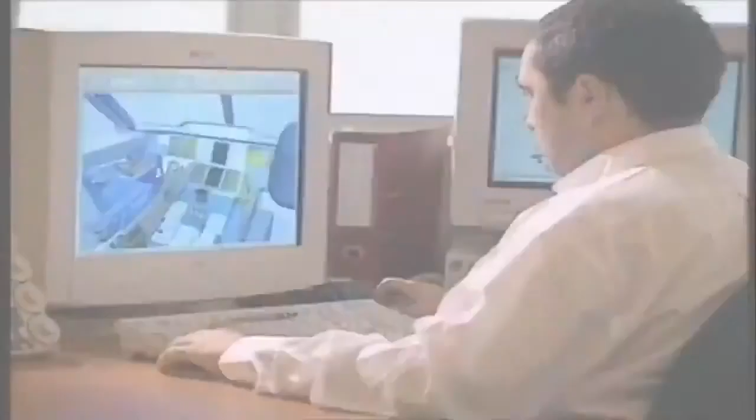It's a mega plane, bigger and heavier than any other passenger plane in the sky. It will hold more people than any commercial jet flying. Designers have spent billions. Now is the moment of truth. Will the world's biggest passenger airliner survive its maiden flight?

An early spring morning, clear skies and a light breeze over southwestern France. Crowding the fields that flank Toulouse International Airport, 40,000 spectators, backpackers, campers and journalists from around the world. All vying for the perfect spot to watch the maiden flight of the Airbus A380, the largest passenger plane ever built.

It's 73 meters long, 7 stories tall at the tail, almost 80 meters from wingtip to wingtip, heavier, longer and taller than a 747, with 2 full levels of seating, enough to hold over 550 passengers.

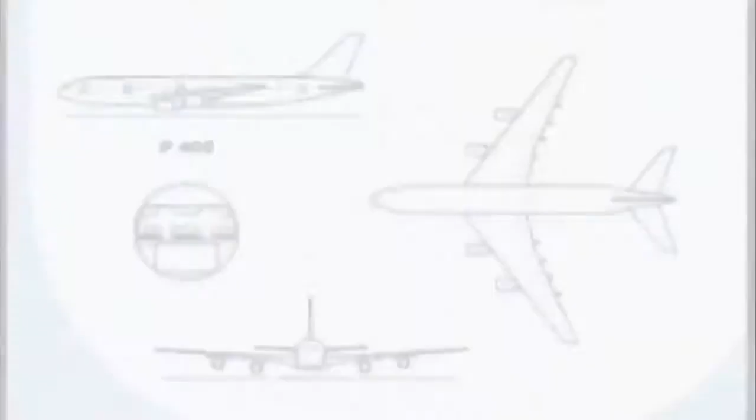Getting this monster off the drawing board required new, super lightweight materials, 4 powerful new mega-sized engines, massive new factories across Europe, and a computerized flight control system more sophisticated than any other in commercial aviation.

This moment is the biggest gamble that the company has ever taken. A $12 billion investment, the company's entire future, and the lives of future passengers all ride on the success of this historic test flight.

Alongside the runway, a hush settles over the crowd as the megaplane comes into view. Gradually, it gathers speed, accelerating to reach its takeoff velocity of 269 kilometers per hour. Then, as it nears the end of the runway, the moment of truth. The massive nose tilts skyward. A sliver of daylight appears beneath the rear wheels, and the Airbus A380 takes to the sky for the very first time.

The engineers and technicians in the crowd breathe a collective sigh of relief. Their baby is flying. The question now is, does anyone want a plane this big? Will the unprecedented size prove a boon or a boondoggle? Is this super jumbo the future of commercial aviation? Or the biggest white elephant since Howard Hughes built the Spruce Goose?

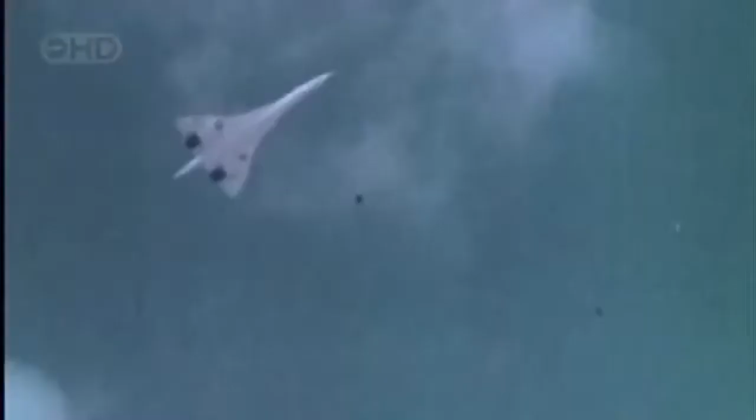The Concorde is here. That same year, Aerospatiale and British Aircraft Corporation, the precursor to Airbus, introduced the Concorde. While Boeing was bulking up, Europeans were getting small, but very fast. The Concorde traded capacity for speed. The plane carried only 128 passengers, but it could cruise at twice the speed of sound, cutting the trip from New York to London from almost 8 hours to just under 3.5. Both the 747 and the Concorde came to be the epitome of luxury in air travel.

These two differing visions came to symbolize a fierce rivalry between American and European aerospace giants. A rivalry that's only intensified with time, even as the business of air travel has changed dramatically. The Concorde, after years of financial difficulties and a devastating crash in Paris, has been grounded. And the 747 is now an aging workhorse, noted less for style and more for the sheer number of passengers it can pack between its wings.

What changed to turn air travel from a luxury to the airborne bus ride that it is today? Simple economics. In just a few short decades, the number of people traveling by air has tripled. Now, every day, hundreds of thousands of people pack into 70,000 flights, taking off and landing at more than 4,000 airports around the world. And those numbers are only going to get bigger, much bigger. Industry analysts predict that the number of air travelers could double again by the year 2020. That is, if anyone can figure out how to squeeze them into an already overcrowded system.

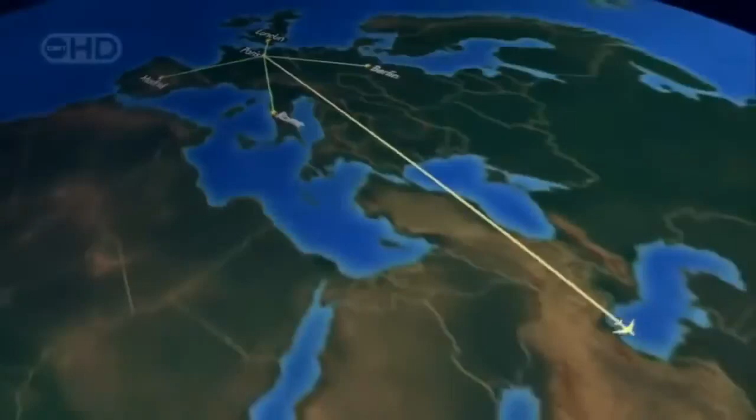The A380, though, is an altogether different order of beast. It's designed for hub-to-hub travel. Passengers will board a small plane near their home, then connect at a major airport to a larger plane, travel halfway around the world, and get off at their final destination. It's a strategy specifically designed to serve the most rapidly expanding long-haul routes in and out of Asia, and to cater to customers who appreciate a bit of pampering.

The plane's sheer size, with 2 passenger decks, is large enough for both standard seating as well as more luxurious features, like a lounge, a high-end shop, 2 staircases, even a waterfall. It's a breathtaking dream. But no one knew if such a plane could be built. Some argued that such a craft would be far too heavy and expensive to be practical. But a tenacious and aptly named Airbus executive, Charles Champion, wouldn't take no for an answer.

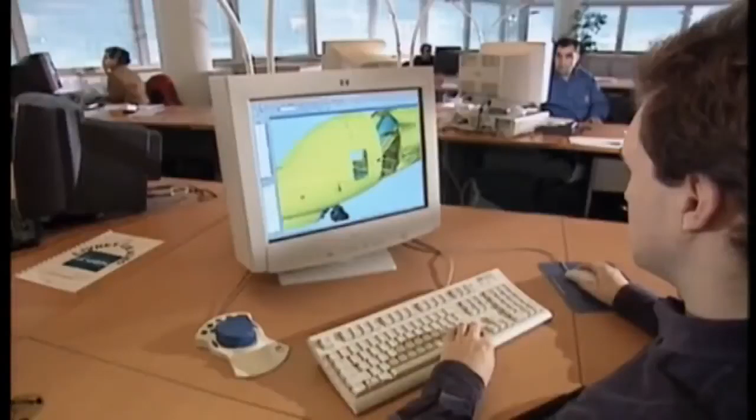He encouraged his design team to think outside the box. Yeah, well, there were lots of weird designs. Some looked at the double bubble. One of their first ideas, the double bubble, a double-wide fuselage. It looked promising, but computer analysis showed that it would be far too heavy and not sufficiently aerodynamic. So Champion sent his team back to the drawing board, and eventually they came up with this history-making concept.

A full-length, double-decker passenger cabin, with a third deck below for cargo. Space-wise, it's the equivalent of 2 complete wide-body cabins, one on top of the other. The new plan called for an aircraft only 2.5 meters longer than Boeing's 747. It was 15 meters wider and 5 meters taller.

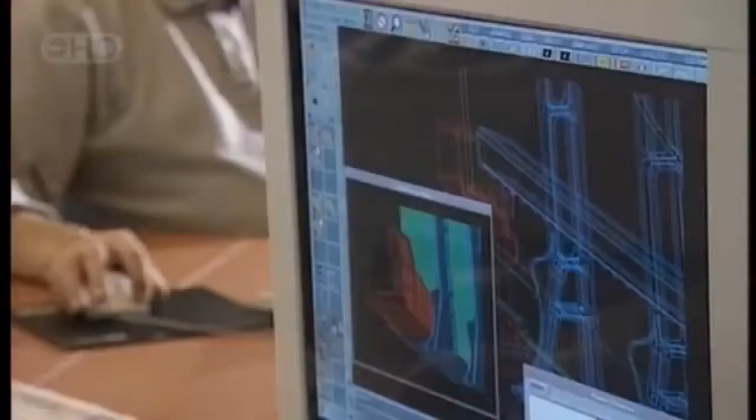But when they ran the design figures through the computer, they had a shock. The plane was far too heavy. We came up with horrid figures, saying, my God, this is the weight of the aircraft, doesn't work. So what we did immediately at the launch of the program, or 2-3 months afterwards, we launched a very strong challenge on the weight. The team set out to bring the base weight of the aircraft below 277 tons.

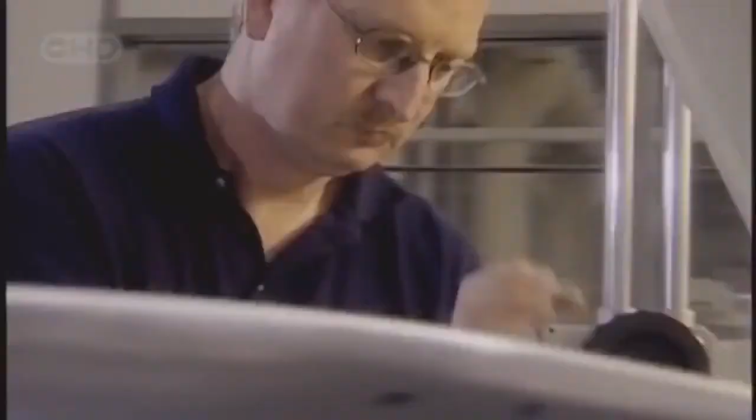That's only about 50% heavier than the 747. An ambitious goal for a plane designed to carry over 100 more passengers and their luggage halfway around the world. Unless Champion and his engineers could find the means to beat that target, the dream would die.

Airbus engineers were faced with a design challenge that called for a lightweight plane carrying over 550 passengers at a lower cost per seat, not to mention quieter and less polluting than anything in the air. The design team knew they would have to rethink everything. They needed lighter materials, more powerful engines, larger wings, even bigger and smarter factories. Every component would have to be scaled up from supersize to mega size.

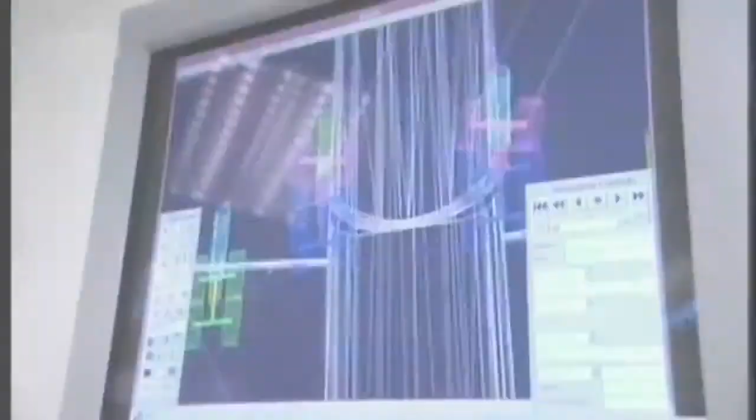But even while the engineers were still scratching their heads over the details, the Airbus sales force was already hard at work, seducing customers with visions of the future. They created a full-sized interior mock-up that promised passengers in coach some relief from the grind of travel, with seats an inch wider than in other planes, and overhead bins 10% larger.

Each plane can also feature a new interior illumination scheme to eliminate the upsetting effect created when flight attendants suddenly switch on overhead lights. The kinder, gentler system in the A380 mimics the gradual transition from day to night and back to daytime again. These and other innovations make the plane distinctive, but it's the promise of opulent luxury that really turns heads. To help build excitement, computer programmers constructed a virtual showroom where airlines can bring to life their wildest design fantasies.

Ladies and gentlemen, this is your captain speaking. I'd like to welcome you on board this 3D tutorial for the A380 main deck door.

Using this 3D lab in cyberspace, airlines can experiment with cabin layouts, color schemes, and seating arrangements. Airbus has encouraged customers to think big. Bathrooms with showers, spacious lounge areas, restaurant bars, and even an in-flight salon. But until the planes are actually put into service, most airlines have chosen to keep their final designs as closely guarded as any other trade secret.

Of course, no dream could take flight until engineers came up with a way to lift all that weight. In late 2000, builders finally settled on a design. For power, they would buy engines built by Rolls-Royce, capable of providing 30% more thrust than the engines used on the 747. Each massive power plant cost $15 million, as much as a ton of gold. Altogether, they account for almost 25% of the cost of the entire plane.

If there's one thing this aircraft needs, it's thrust that won't quit. Each engine provides up to 80,000 pounds of force. Running at top speed, this mega guzzler sucks down a litre of gasoline every second. The A380 is designed for routine flights lasting 13 hours or more. That means when it's fully tanked for takeoff, the A380 carries a lot of fuel. 260,000 litres, 20% more than the load carried by the 747.

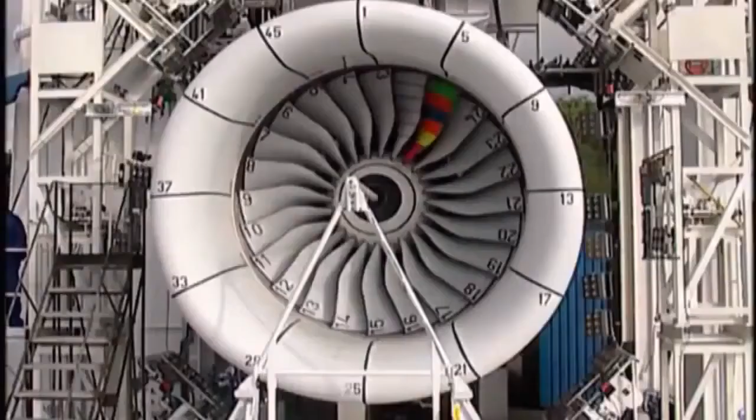Just imagine what would happen if anything threatened the integrity of one of those fuel tanks, like a catastrophic engine failure that sends shards of metal tearing through them. That's the nightmare that haunts engineers at Rolls-Royce, and they're about to destroy an engine to make sure it never occurs. These 24 titanium fan blades suck air into the maw of this A380 engine. Each blade is 1 meter in length and weighs 15 kilograms. Lightweight, but super strong.

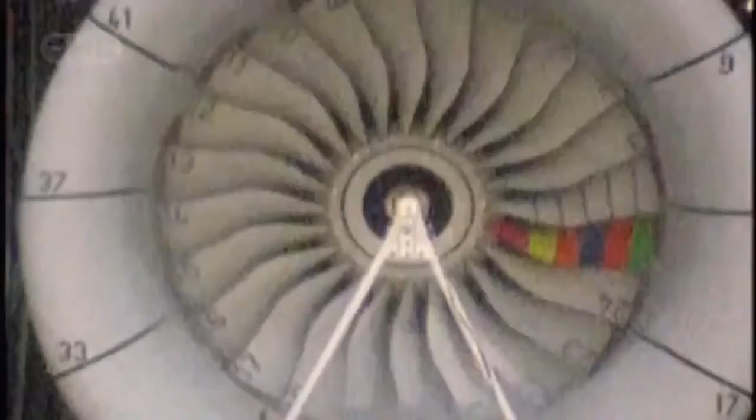When the engine is roaring along at full throttle, the blades spin at almost 3,000 revolutions per minute. The centrifugal force at the tip of each blade is equivalent to the weight of a 110-ton locomotive. If one of these were to break off and escape into the engine, it could wreak unimaginable destruction to the plane. That's why Rolls-Royce engineers are about to conduct an engine failure test. They're going to intentionally cause one of the fan blades to break off at full speed in order to prove that the engine enclosure can contain the damage without letting any metallic fragments escape.

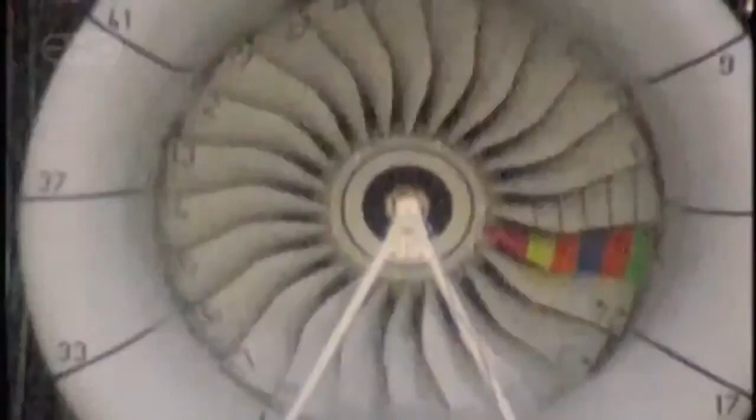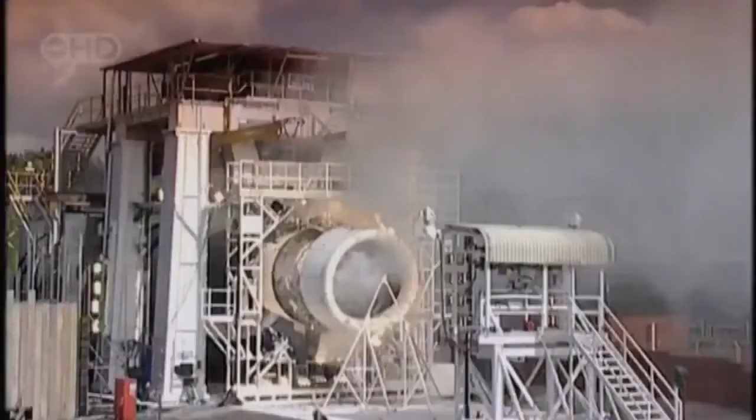In the process, they will totally trash this $15 million engineering marvel, a small price to pay when the lives of over 550 people could be at stake. A super slow-motion camera captures every moment in excruciating detail. The blades are striped to make visual measurement easier. When the fan is spinning at full speed, engineers send a signal to explosive bolts at the base of the multicolored test blade. Faster than even this camera can see, the knife-like piece of metal shears off and flies into the engine mechanism, wreaking havoc, but no fragments escape.

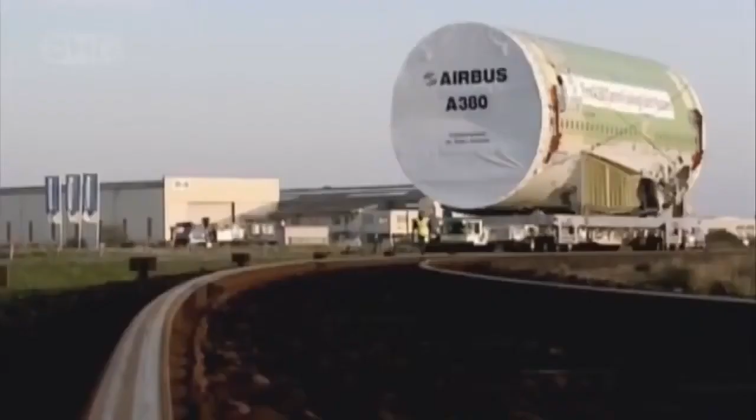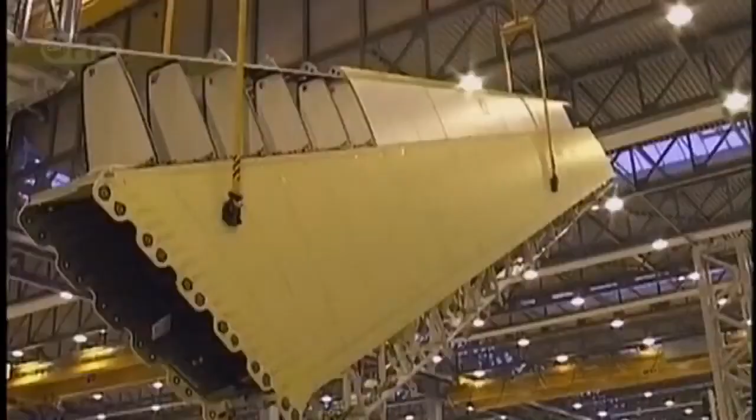The A380 engines are safe for flight, but there are many more pieces to the puzzle. Every other major component would have to be designed from the ground up. Luckily, Airbus has already turned the world into a giant mega factory, with 1,500 suppliers and facilities used to build its existing planes, scattered over 30 countries, yet tightly linked by an advanced communication and transportation network. To assemble the hundreds of A380s the company hopes to sell in the coming decades, planners settled on 5 countries to build the major components. Wings in Wales, engines in England, the fuselage and vertical tail section in Germany, the horizontal tail section in Spain, and of course France, where all the pieces came together to assemble the finished plane.

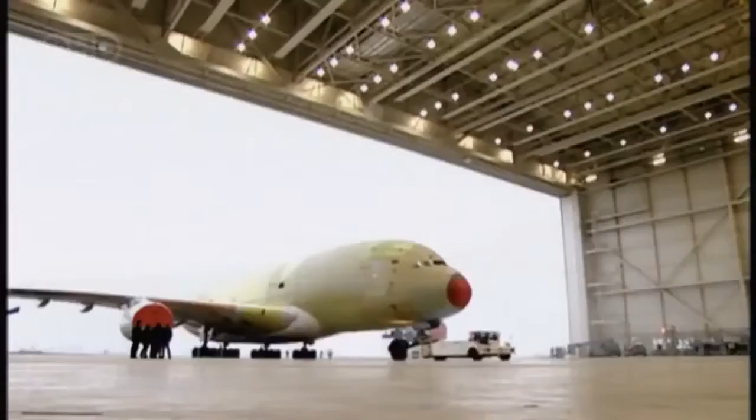The process begins in Wales, in 2 huge new wing factories, built to assemble the largest and most structurally complex commercial airplane wings ever designed. 32,000 components, shipped in from every continent except Antarctica. The wings on the A380 are true mechanical marvels. They provide flight control and enough lift to carry the fuselage, plus the 4 supercharged engines, each weighing nearly 6.5 tons. And with 260,000 liters of fuel loaded inside 10 interior locations, the wings are also flying fuel tanks. They're one of the most critical structural components in the entire aircraft.

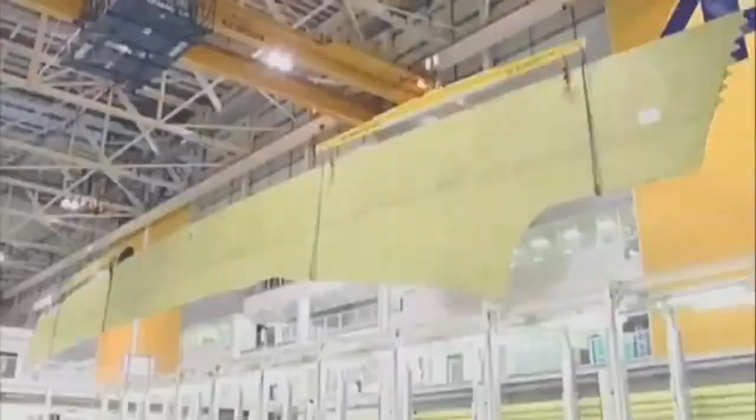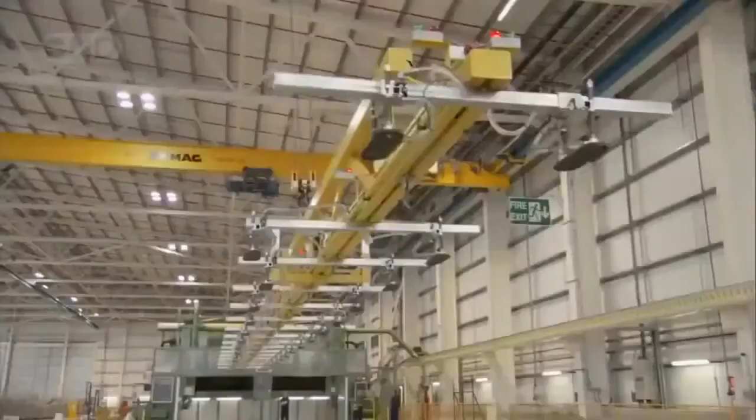The precision construction process begins with sheets of aluminium. Destined to be shaped into the 10 panels that cover each wing, each piece has its own shape and weight requirements. To whip one up, just follow 3 not-so-easy steps. Shave it, wrap it, then bake it. This 34-meter-long slab of aluminium weighs in at 5 tons. Way too heavy for the wing panel it's destined to become. In its final form, it will weigh close to 1 ton. So off it goes, to get the aerospace version of a tummy tuck. Overhead cranes use 32 powerful suction nozzles to lift and transport each aluminium slab.

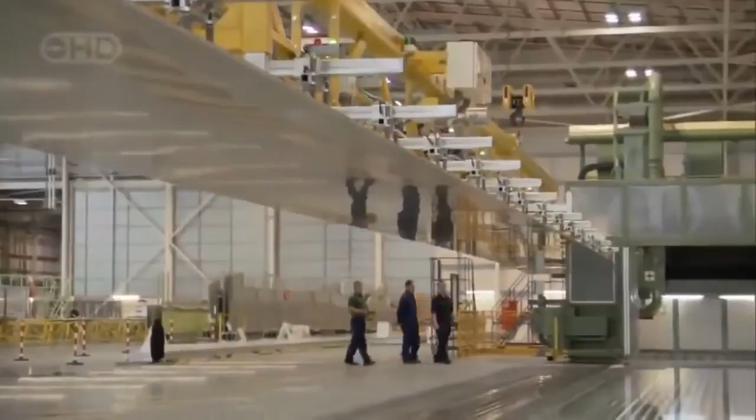Tim Fernifer carries the burden of responsibility. Using a remote-controlled steering device, Tim guides the 5-ton piece of metal across the factory floor, but he can't do it alone. His team must watch the motion of the wing panel throughout the ride. You've got to be particularly careful that I'm handling it. But I can't see down the other end, so I need another pair of eyes down the other end. It's just health and safety issues. You have to watch, make sure everybody's out of the way when it's actually moving. It's a dicey ride across the factory floor before the huge sheet can settle safely into position.

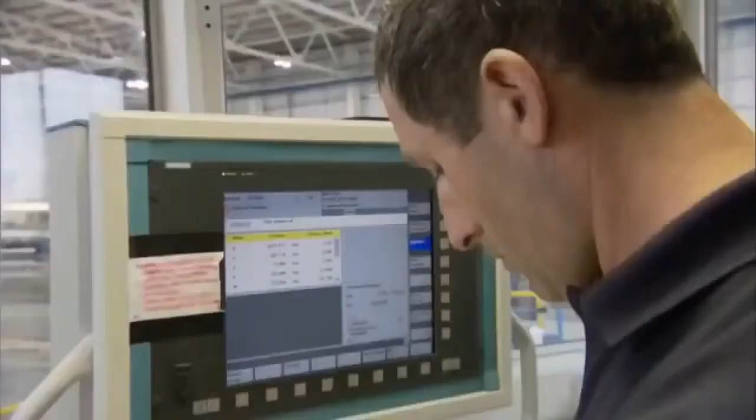A milling machine 40 meters long. Like an oversized cheese grater, the precision cutting head slowly cuts back and forth across the surface of the wing, painstakingly shaving the aluminium until the panel shape matches the 3D contour map stored in the machine's computer. The process takes up to 3 days. It eliminates 75% of the panel's weight while maintaining its strength.

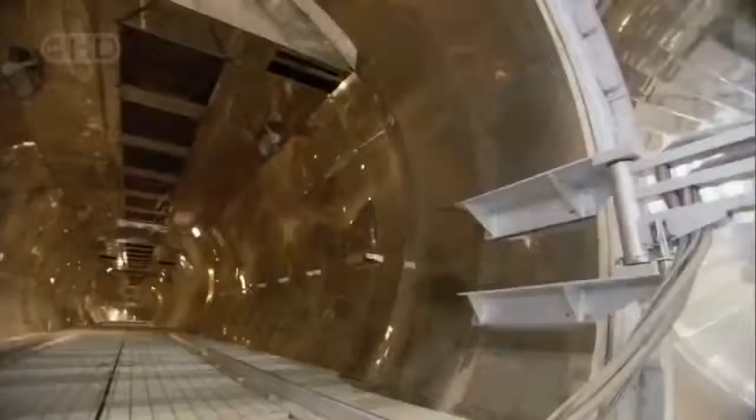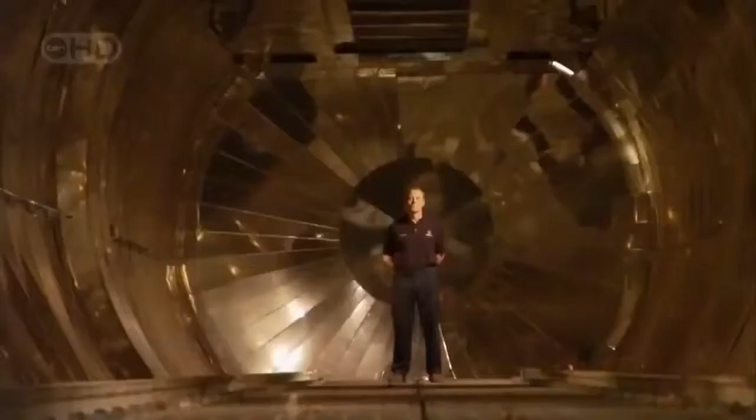Then it's ready for the oven, one of the world's largest pressurized heat chambers, 42 meters long, almost 6 meters wide. Technician John Massey has cooked plenty of wings for smaller Airbus planes, like the A320. It's a challenge to see it go from the size of the 320 to the size of the 380. It's a huge, huge jump. The A380 wings are 50% larger than A320 wings. That means a 50% greater chance of error in this critical process.

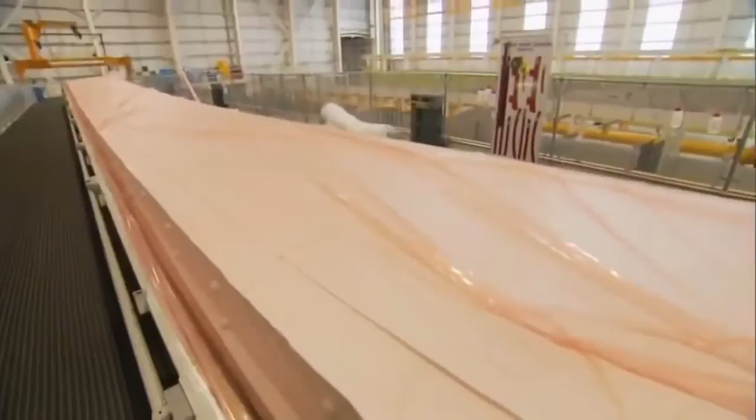Baking requires careful setup. First, Massey and others place the segment in a special metallic form. Then they vacuum seal the entire assembly with a massive piece of plastic shrink wrap to protect the metal from contamination. Inside, the heat must be uniform across the entire panel, 150 degrees centigrade, with no room for error. We try to avoid any changes in the vacuum or the temperature, so the temperature must remain constant right throughout the process. It must maintain within 3 degrees, otherwise the run is invalidated. After 24 hours, the panel is ready.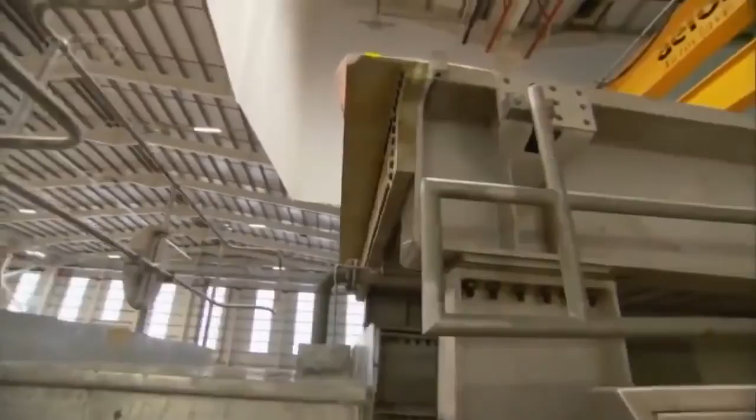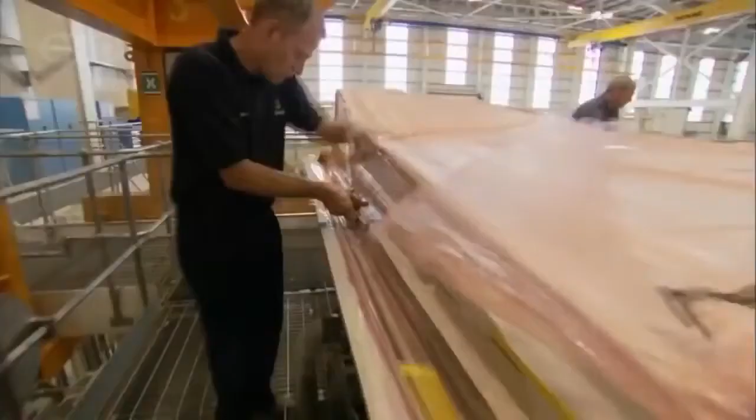Specially equipped vehicles rise up and move into place in front of the oven. All eyes are on the plastic protecting the wing panel. If it breaks, the aluminium wing piece is compromised. A disaster. The entire wing panel would be worthless. If the bag bursts, it means starting the job again from scratch. Anxiously, they scan the surface for any breach. At last, the wing is cool enough to touch. And good news, the bag appears to be intact. Finally, the wing segment arrives in its docking bay. Here, the technicians first remove the plastic and cloth wrap.

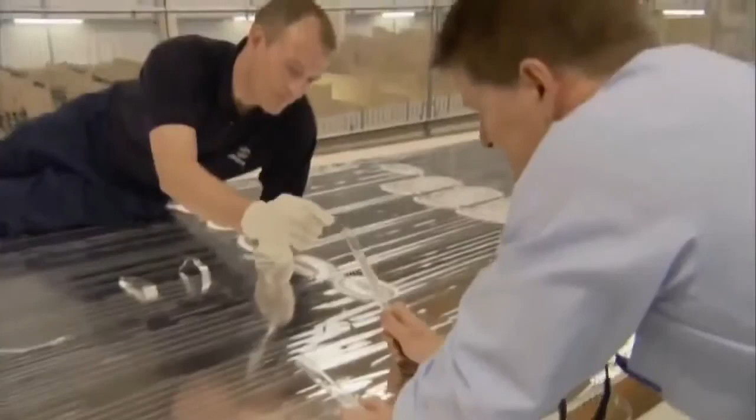Now begins the tedious search for flaws. John's boss, Gareth Williams, arrives to inspect the piece. He retrieves small metal rods that were baked onto the top of the wing panel. Each of these cylinders tells an important story about future safety. These are test pieces which are made of the same material as the wing panel, and we use them to confirm that the heat process that this part's just gone through is correct and it's to the right specification. When this testing phase is complete, Gareth and John get the okay to move the wing to its next destination.

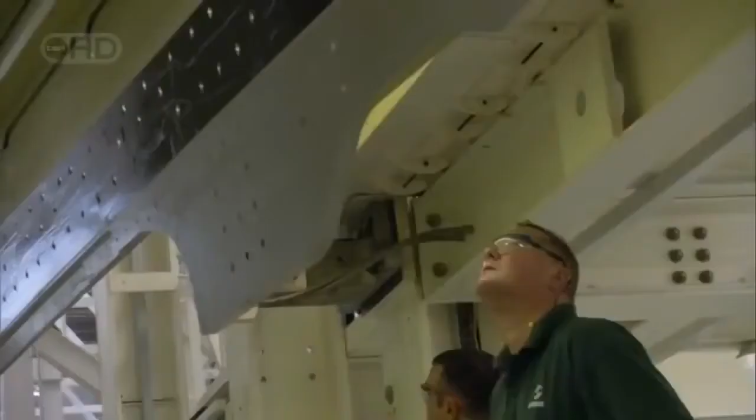The nearby wing assembly plant, an enormous brand new factory located just up the road. It's one of Britain's largest industrial buildings built in this century. It's nearly 85,000 square meters in area, equal to 12 full-size football pitches. This is where the builders attach the aluminium skin panels to the wing skeleton. George Lee guides his team through the tricky assembly process. Today they're preparing to lift and place one of the largest of the 10 aluminium panels, 34 meters long and weighing in at more than 1 ton.

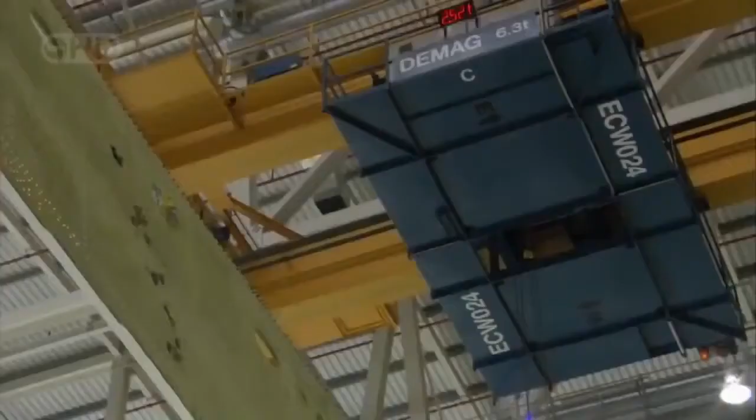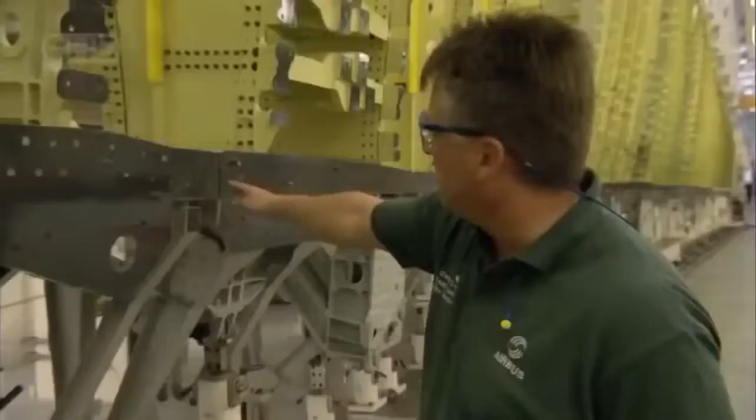Size is a great challenge because everything requires some form of overhead lifting. Nothing can be lifted manually, so virtually everything requires overhead craneage movement, and therefore the management of the craneage system is very, very important. The panel hangs like a huge guillotine, suspended over the factory floor. But that's not all that's hanging over the assembly team's head. Time is running out. Along the edges of the partially constructed wing, builders have applied a sealant that'll help to ensure the integrity of the fuel tanks. The sealant dries quickly within hours. The team must fit the wing panel into place before the sealant dries, or the wing could be defective. This time they're cutting it close.

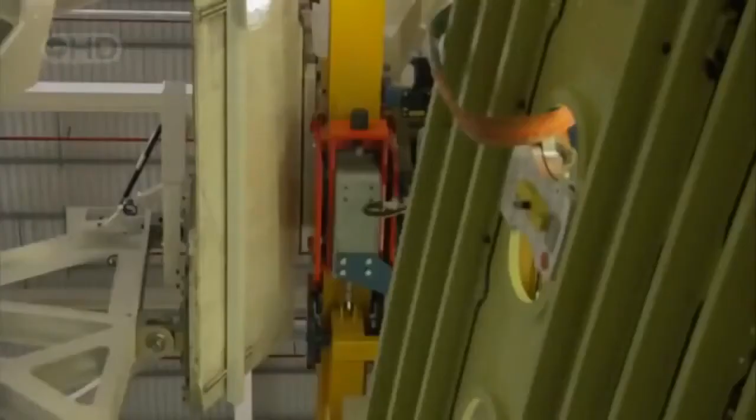The only concern I've got is the time factor. If they don't succeed, the team will have to scour the sealant off the aluminium surface and start the whole process again. Finally, the panel settles into place. 1 down, 9 to go. It can be stressful, yeah, it can be stressful. At certain times, it's an enjoyable job, because when it actually all works and goes together, it's quite enjoyable. You've made it an achievement.

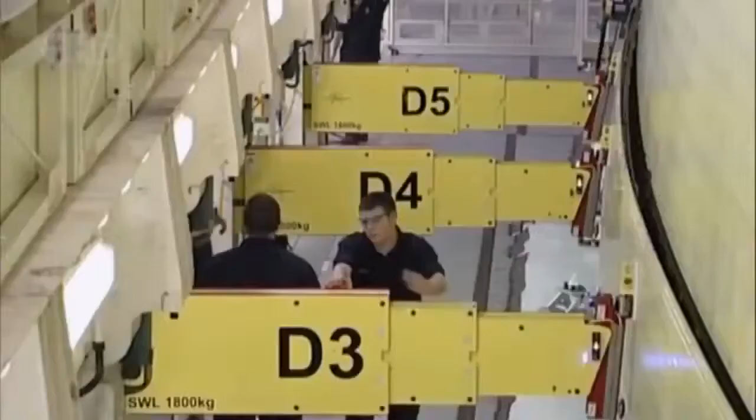Now it's time to glue and bolt together the pieces, like building the world's biggest model airplane wing. This part of the process remains a carefully guarded trade secret. The company wants our cameras off. No cameras.

The secret assembly process inside the jig will take nearly 4 weeks to complete, but it takes more than a wing to make a plane. All across Europe, more factories are coming online, pumping out body parts of this giant Frankenplane. But not everyone is happy to see this kind of progress. Some locals in Germany are up in arms over Airbus's ambitious plans.

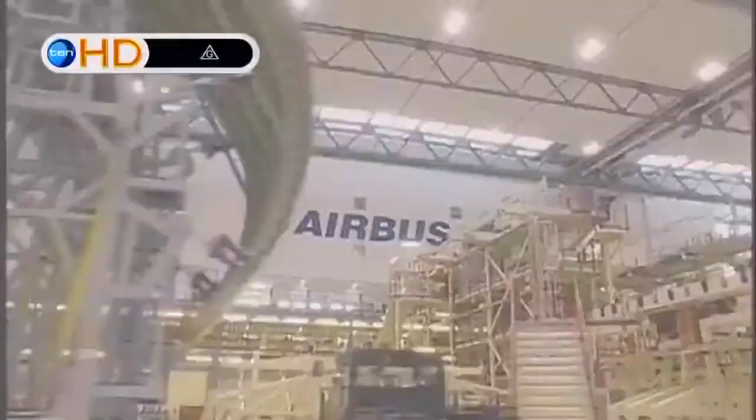This is the newest Airbus factory in Hamburg, a megastructure big enough to house 4 A380s side by side. Airbus has been building airplane fuselages in Germany for more than 30 years. But with the announcement of the A380, the company needed to massively expand the site and send finished planes here to get tricked out on the inside and painted on the outside.

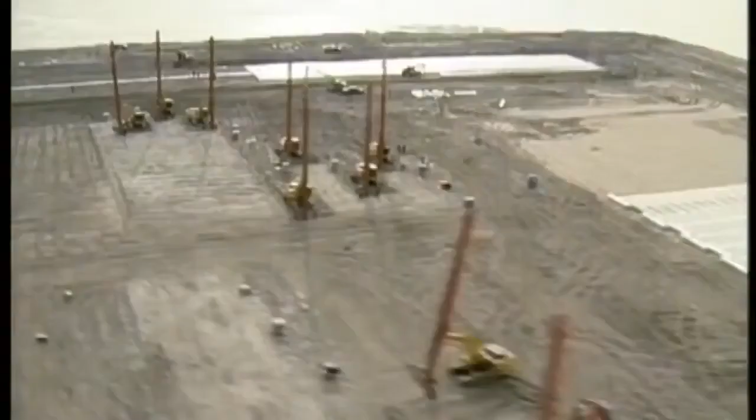No matter what the customer wants their plane to be, a 550-seat cattle car, a high-class hotel in the sky, or even a heavy-duty freighter, this is where the seats, the carpets, the stairs, and yes, even the bar and the waterfall will all be installed. The expansion plan called for 3 new buildings and a longer runway to accommodate the massive plane, but there was a problem.

Airbus's main factory here sits alongside Germany's Elbe River, smack in the middle of Europe's largest tidal wetlands. It's a very special area because we have there the influence of water from the country and tidal water from the sea. So we have a mixture of sweet water and salt water. This fragile ecosystem is home to 70 species of migratory birds. Now 71 if you count the Airbus A380.

Airbus wanted to fill in 140 hectares of pristine wetland, and local activists cried foul. A pitched battle in the courts and demonstrations in the streets delayed construction of the factories for over 2 years. But eventually, local and national politicians who wanted to bring business to the community intervened.

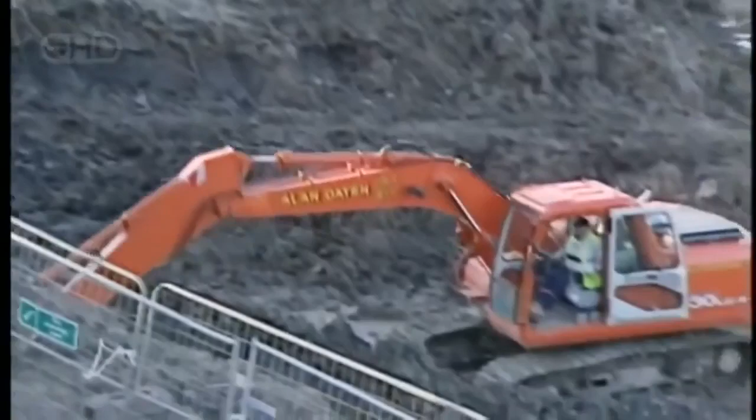The factories went up. One got busy building fuselage segments, but the other 2 stand nearly empty. More lawsuits still block the Hamburg facility from taking delivery of all of the planes it's meant to finish. Unless the company wins in court, it may have spent a few hundred million dollars building a factory of little use. The problem lies with the runway. Airbus needs a longer runway to accommodate a heavy-duty cargo version of the A380.

We need the runway extension in Hamburg for the pilot to test the performance of the aircraft. And he only can test this when he has an aircraft with a weight which is approximately the weight you normally have in cruise altitude and a normal scheduled flight.

That plan to lengthen Hamburg's existing runway has met with considerable resistance from locals. Their concern: extending the runway will bring the tarmac to within just 450 meters of village orchards, and uncomfortably close to a Lutheran church that houses a priceless organ built in 1688. A delicate instrument that could be damaged by ground vibrations and wake vortices, turbulent bands of air similar to miniature tornadoes.

We have very precise information on the generation of these wake vortices, so small, let's say, tornadoes, wind generated by every aircraft, more or less, which can affect buildings and also persons close to the runway or close to the flight path. And we have predictions that we should expect occasionally winds up to Beaufort 12, which is about 130 kilometers per hour in the core, and these tornadoes will hit the church tower and the roof construction.

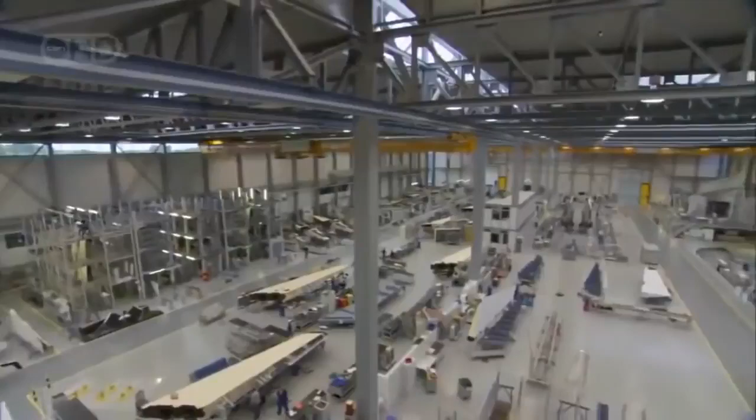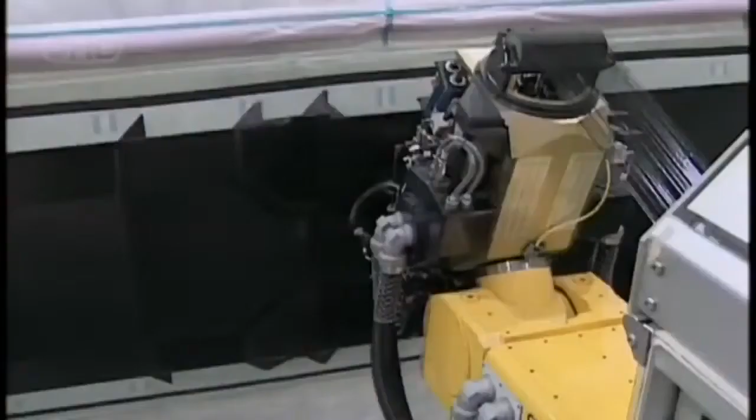The company is using a futuristic material to build the largest commercial aviation tail fin in the world. It's called carbon fiber reinforced plastic, and it's made out of the same stuff that gives diamonds their incredible strength. Carbon fiber is 6 times stiffer than steel and much lighter. It's the only option if builders are going to keep the weight of the plane below the target of 277 tons.

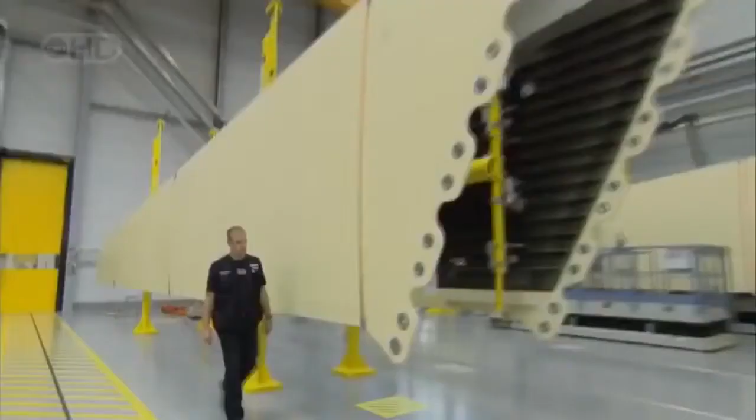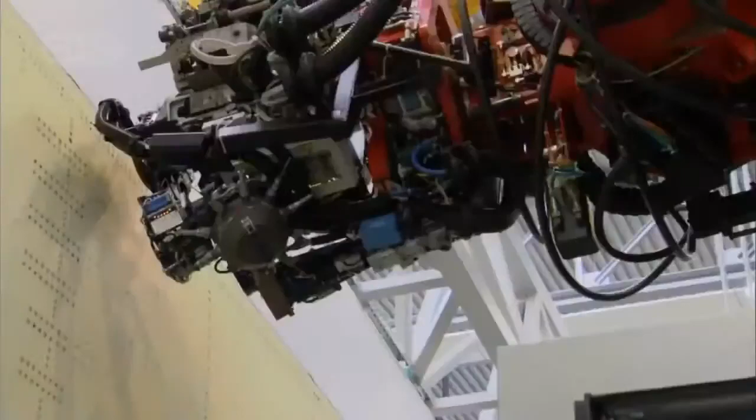Unlike forged metal, carbon-reinforced plastic parts are actually woven, like cloth. Fabricating machines spin out tail panels by combining super-strong carbon fibers with plastic resin to create almost any shape the designers can imagine. After baking, strengthening, painting and drying, technicians join the lightweight panels to the tail skeleton with the help of this computer-controlled riveting robot.

Working around the clock for a week, the robot makes 10,000 critical connections with tolerances no human can match. The integrity of the tail fin is crucial to the safety of passengers. Airbus engineers know only too well what can happen if a tail structure fails.

In 2001, American Airlines Flight 587 left JFK Airport in New York. Less than 3 minutes later, the Airbus A300 aircraft had crashed in Rockaway, a neighborhood in Queens, New York.

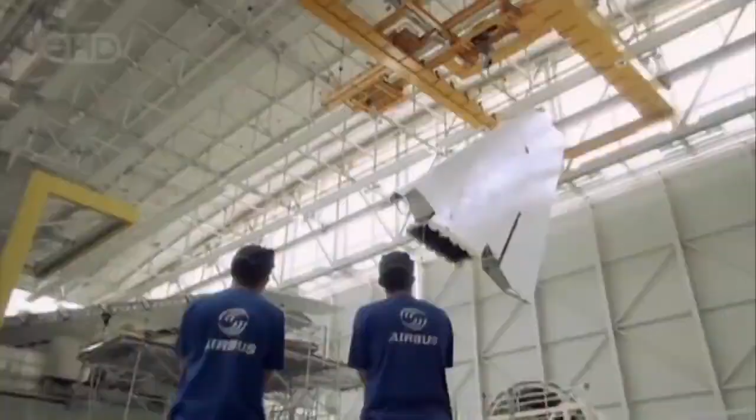It was the second deadliest crash in US history, and investigators made a disturbing discovery. It had been caused when the tail fin and rudder, made partly out of composite materials, sheared off as the plane accelerated. Investigators concluded that cockpit errors, not a failure of the carbon composite material, most likely caused the crash. And builders have applied the lessons of that catastrophe to the tail fin of the A380.

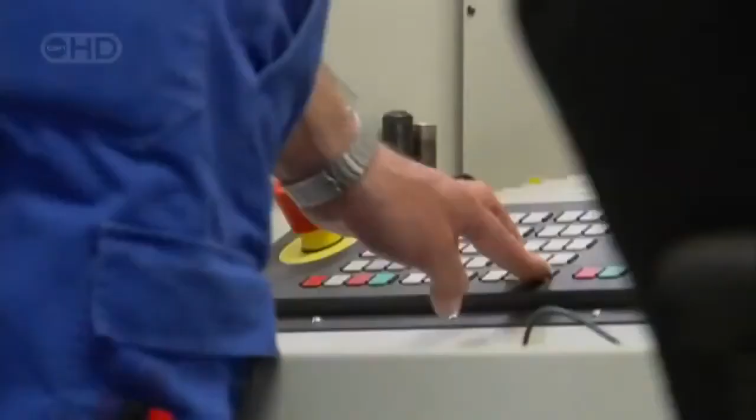But today, something's gone wrong on the factory floor. A lightning strike zapped the power supply, and now the precision riveting robot is dead in the water. We had a storm, a lightning strike. The PC failed and the hard disk was completely gone. Mother Nature has thrown a wrench into the works, causing a total crash of the system. It is electricity. Sometimes it happens. Normally we are protected, but it can just happen.

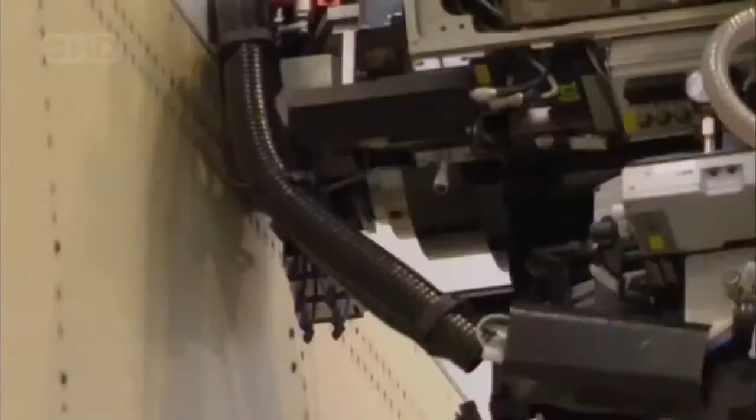Critical hours pass as Kai Baumgartner and his colleagues struggle to get the robot back online. If they can't fix the computer, they can't make the deadline set for finishing this tail fin. Kai and his team must find the problem, and quickly. By the end of the shift, the sound of riveting echoes through the factory once again. Kai is finally back at work, personally verifying that every one of the 10,000 connections is perfect.

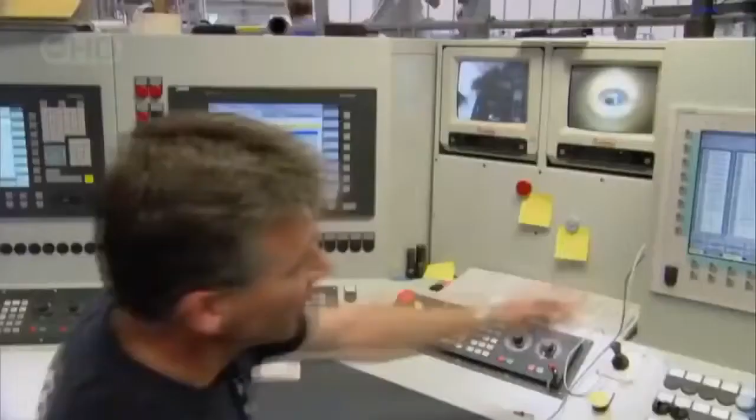A tiny camera positioned on the end of the riveting machine allows Kai to carefully examine each rivet, making sure to catch any abnormalities in the process. I make sure that the drill doesn't get stuck or any mistakes happen. I have my different systems here. It can happen that something is stuck or that an error occurs. It's a repetitive process, but Kai must remain vigilant to safeguard the lives of future passengers.

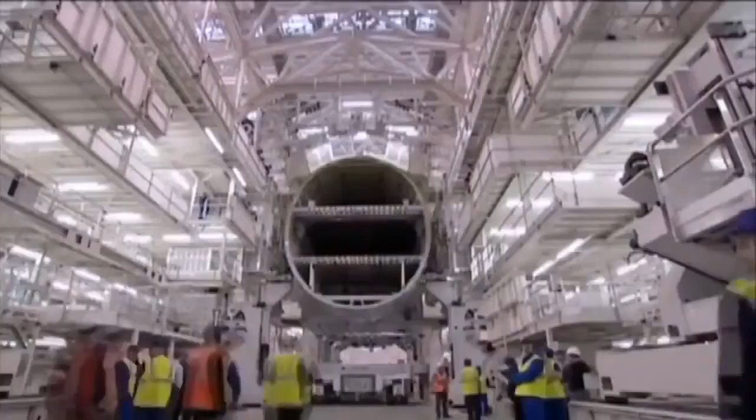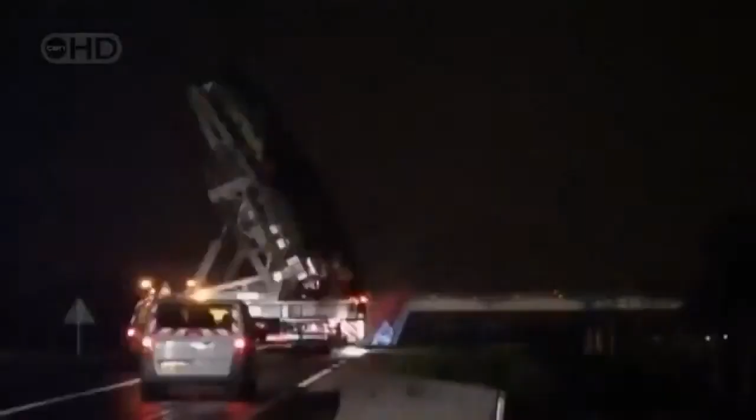Around the world, manufacturers and suppliers are putting the finishing touches on the components of the A380. But putting all the pieces together will be a logistical nightmare. Airbus's existing transport system, the custom-built mega freighter called the Beluga, is too small to haul the A380 components to the assembly factory in Toulouse, France. So builders came up with a risky plan to haul millions of dollars of critical components by water and land.

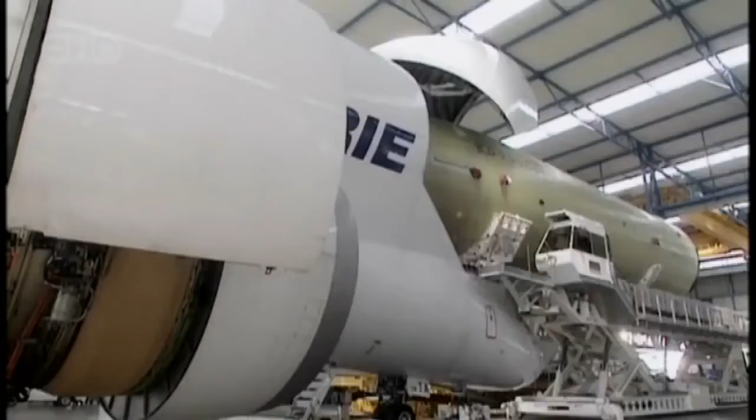Airbus had a problem. They needed to move pieces for the largest passenger plane in the world from factories all over Europe to their final assembly plant in Toulouse, France. For smaller planes, they could use the Beluga, Airbus's distinctive custom-built transport plane. The Beluga's cargo hold measures 7 meters high, 7 meters wide, and 38 meters long. Big enough to swallow the fuselage, wings, and tail sections of Airbus passenger planes like the 150-seat A320.

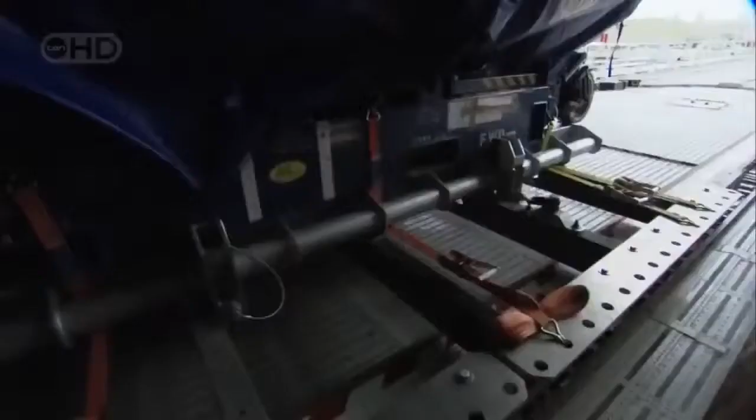But when Airbus decided to build the massive A380, the sheer size of the parts overwhelmed even the Beluga. The Beluga is far too small to carry the A380's enormous double-decker fuselage or its record-breaking wings. So to get their parts to the assembly plants, the company now had to move them by sea and over land, instead of a 2-hour ride in the belly of the Beluga. Parts for the A380 joined a days-long parade of specially outfitted ocean ships, river barges, and trucks.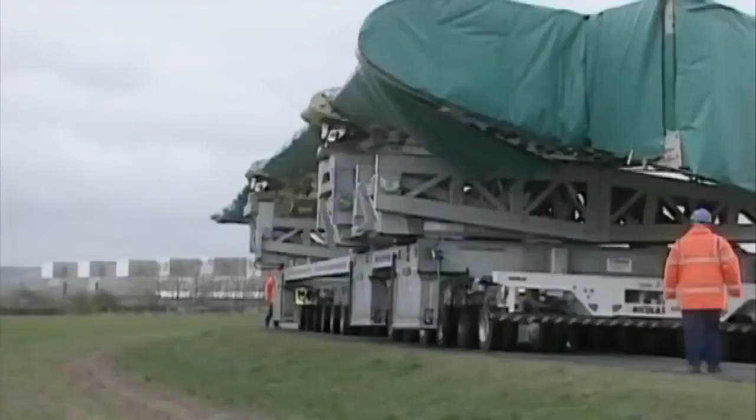Keeping this massive system on schedule is the job of Surface Transport Coordinator Philippe Nedelec, who has to keep it all moving fast. I like to say that I am a kind of conductor. I have to impose the tempo to everybody. Wings and fuselage arrive by sea in the port city of Pauillac in Bordeaux. From there, it's 96 kilometers by barge down the Garonne River.

It's a tricky bit of navigation to clear the historic Pont de Pierre Bridge, a prized landmark built by Napoleon almost 200 years ago. We have to cross a very old bridge. And at the beginning, the Bordeaux people were very afraid. What are these Airbus people going to do with our nice bridge?

To maneuver beneath the Pont de Pierre, Philippe and his team keep careful track of the tides and the weather. If they don't time their trip just right, if the water is too high or the currents too strong, they could collide with the bridge, destroying precious cargo and damaging a priceless piece of history as well. But waiting for the perfect moment isn't always an option.

Suppose we miss a call for weather condition or some other things, then the boat can miss a tide, so we can miss 6 hours. And with these 6 hours you can miss 1 week, because we cannot start the convoy, the road convoy, every day. It's not so easy. We cannot start when you want. Every pass under the bridge is a potential disaster. This time, they make it through, but just barely.

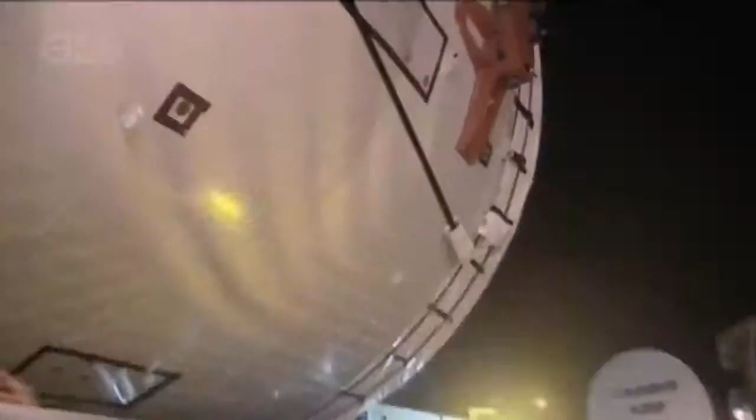Next, it's a handoff to a fleet of trucks and their escorts. Now it's a slow crawl, 16 kilometers per hour for the last 250 kilometers of the journey. You cannot leave these trucks alone. So you have some trucks for... It's very, very strange. People are very, very interested with that and very pleased. It's like a show, a permanent show, paid by Airbus.

So far, this roadshow has had an exotic appeal. But will they still be clapping when convoys like this grind through town once a week? Ultimately, that's the pace Airbus will have to keep if they're to meet their manufacturing targets. At last, the convoy arrives at its destination, the final assembly line, the nerve center of the entire operation. The final assembly line sits on the edge of Toulouse's Blagnac Airport.

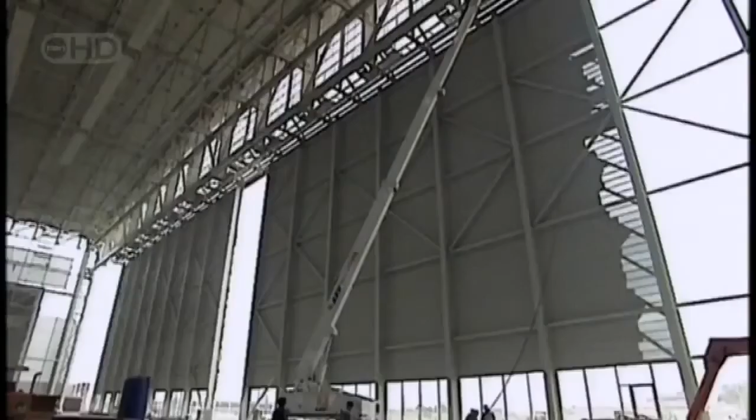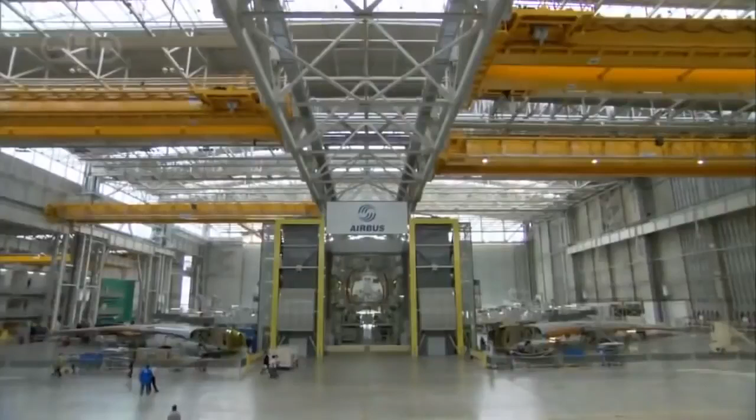As with all A380 factories, this one is huge. 500 meters long by 250 meters wide and 15 stories tall. 32,000 tons of steel, enough to build 3 Eiffel Towers. It's in here that the massive plane finally begins to take shape, with the help of a gargantuan assembly structure known as a jig. According to Julien Pouillou, there's nothing else like it in the world. We're standing in front of the biggest jig that is used in the world to assemble an aircraft. This is the Station 40.

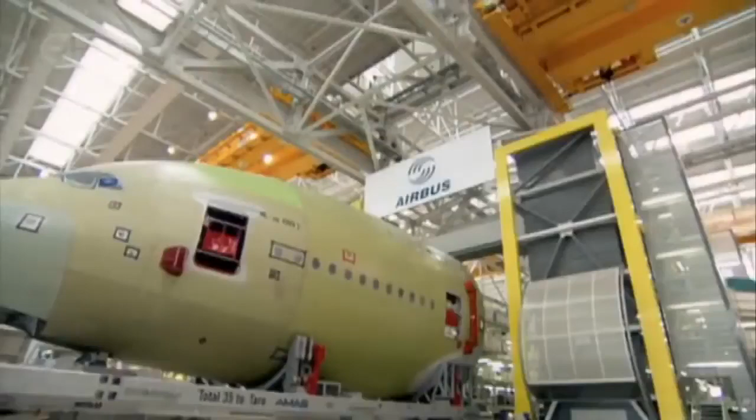Station 40 is where the fuselage, wings and tail all come together. The one-of-a-kind jig stands 5 stories tall, weighs 1,200 tons, and comes equipped with 4 elevators to carry workers to their stations. This is where theory becomes reality, as pieces made all over the world finally come together. If there's been any error, if the pieces don't measure up to spec, or if the joints don't come together just right, within millimeters, the huge passenger craft won't be fit for flying.

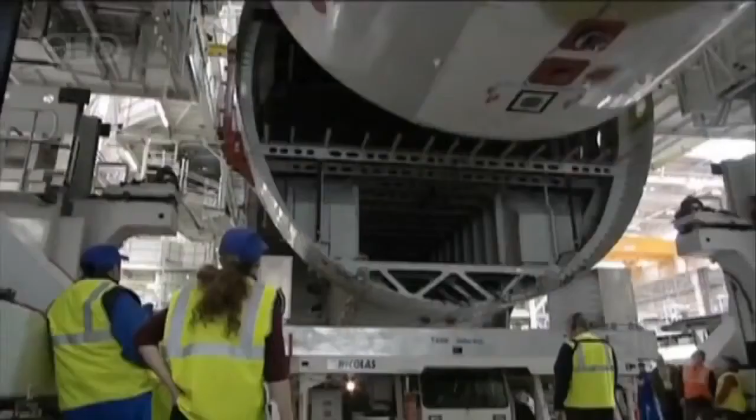The lives of future passengers depend on the steady hands of these craftspeople and engineers, working inside the mighty Station 40. The challenge is for us to assemble those pieces together at the same time, because we have a lot of workers working in the same area at the same time, and they have to do all sorts of completely different tasks. One has to take care of the wings and one has to take care of the fuselage, and so they are not doing the same job, but they have to do it together.

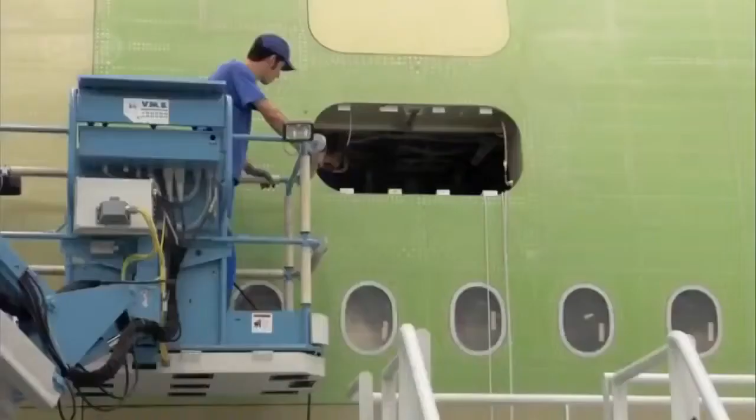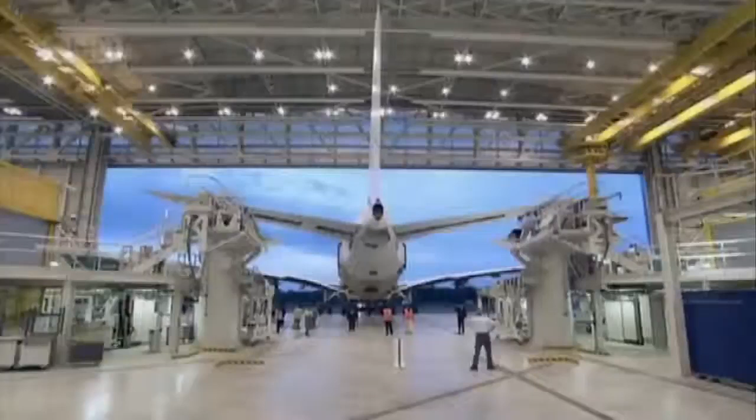Work on this plane now proceeds at an intense pace. It'll take 4 weeks to complete the assembly. Once the plane has been released from Station 40, it moves through a pair of 100-meter wide sliding doors and makes its way to the systems hall. Inside this gigantic space, 3 A380s can sit side by side comfortably, while technicians swarm over the superstructure, testing the electrical, hydraulic and plumbing systems that'll bring the dormant aircraft to life.

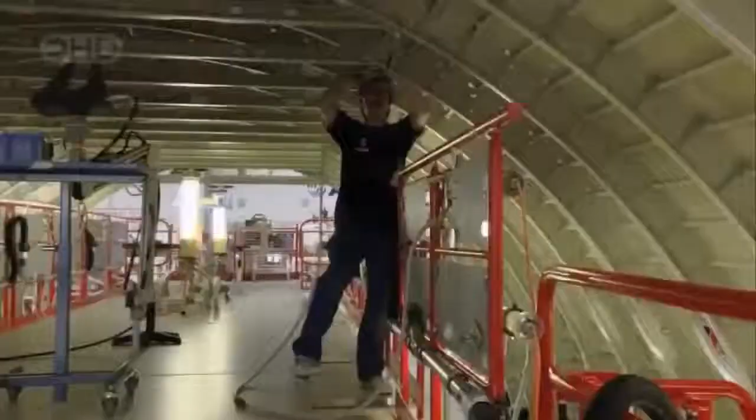Building just one A380 is a massive job, but for Airbus to survive, they're going to have to speed up production to a breakneck pace. Eventually, the Station 40 team will have to crank out a defect-free plane every week. But before that can happen, the plane must be proven airworthy. Now all eyes are on the skies over southern France, as the gathered crowd wonders, will the A380 survive its maiden flight?

At Blagnac Airport in Toulouse, 40,000 people anxiously scan the skies, searching for some sign of the A380. All flights in and out of the airport are put on hold. The skies over Toulouse are eerily quiet. Nearly 4 hours have passed since takeoff. If all goes as planned, the huge airliner should swing into view at any moment. But if there's a problem, the flight crew will quickly discover how well their training has prepared them for disaster.

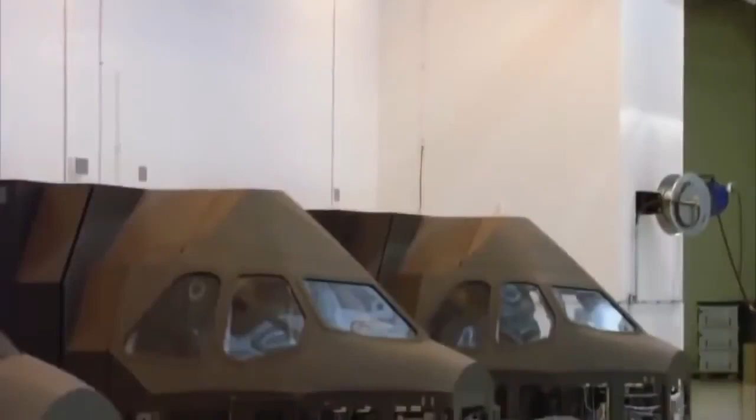Much of that training took place using powerful computers, programmed to mimic the behavior of the A380. That's the theory anyway. In a simulator like this one, with a computational engine 500 times more powerful than a home video game console, photorealistic visuals help pilots to get a feel for the plane. Despite the A380's unprecedented size, Airbus engineers have tried to make it fly like any other airliner. 100 knots. The task of testing the verisimilitude of the simulator experience rests on the shoulders of pilot Claude Lelaie.

I would say that it's exactly as a conventional aircraft. And it's quite amazing because this aircraft is so big and so heavy. This surprised most people, and especially pilots. One of the most important functions of simulators is to give pilots the chance to flirt with disaster. Very simple, and one engine is shut off. This is engine number 4, and look what is happening. The aircraft is just moving slowly on the right side.

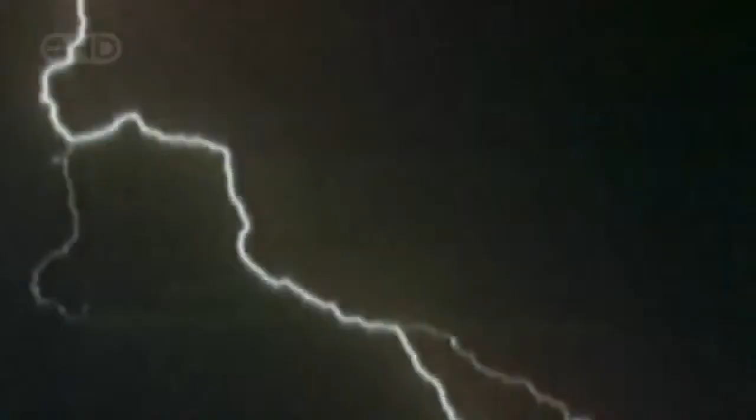It would take a lot more than an engine failure to knock this monster out of the sky. But test engineers are nothing if not imaginative, and they've loaded their simulators with more than 400 different catastrophe scenarios. Everything from a fire in the cargo hold to a devastating lightning strike. The exercises are useful, but no computer can simulate the awesome responsibility of shepherding 550 passengers through the stratosphere. The challenge is to fly with many passengers. I think this is the greatest challenge, yes.

Outside, all eyes are on the sky. The wait is excruciating. Then, a glint of reflected light. At last, the mega plane sails into view. Eager reporters and photographers race to the edge of the tarmac to record this historic moment. A showy flyby excites the crowd. Makes a steep turn, lines up with the runway, begins final descent. Then, at long last, touchdown.

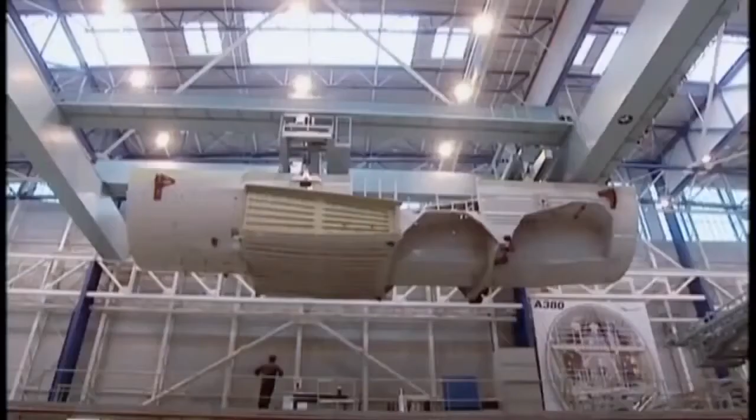They've proven that the plane can fly, but that may have been the easy part. At the time of the test flight, Airbus had 154 orders and still needed 96 more just to break even. To fill those orders, they must dramatically increase the speed of production and convince the world's airlines to pay nearly $300 million for each plane. But even while potential customers were lining up to drool over decor, and the engineering team was still basking in the afterglow of the successful first flight, Airbus surprised the industry when it unexpectedly announced a 6-month delay in the delivery of the first aircraft.

Early customers who took the risk and put down deposits before the first plane had ever been built are not happy. Some analysts believe the plane is still heavier than Airbus promised, but Airbus insists that the delay is merely routine. The real achievement will be when the customer says, "Great, this is what I expected, I love it, give me more." If the last 40 years in the history of aviation is any guide, and more people fly further and more often, year after year, then Charles Champion's daring bet may well pay off, and the A380 just might become the flagship of commercial aviation well into the 21st century.